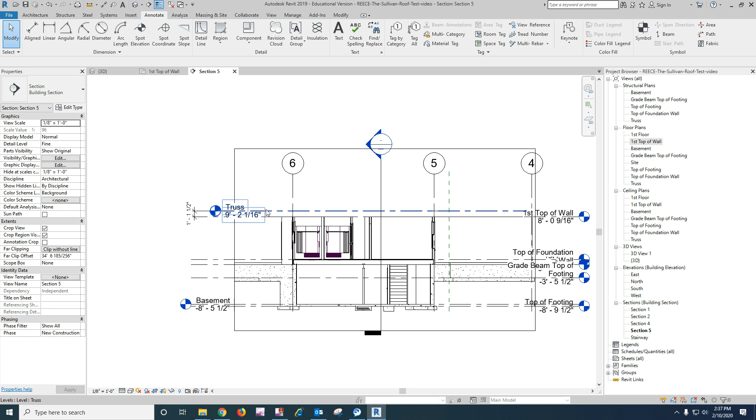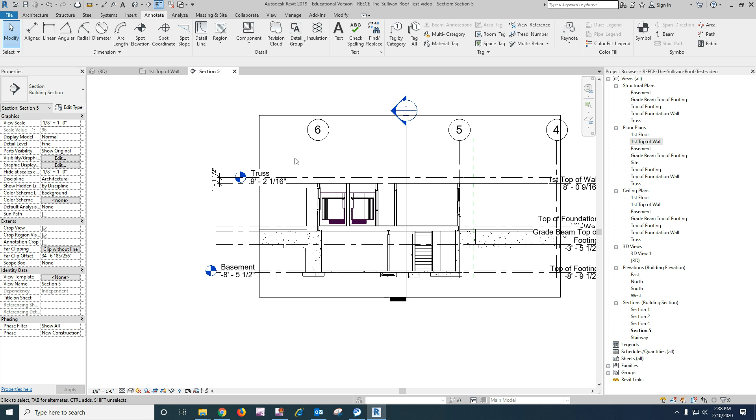I added another level, and I called it just truss, and I brought it in here, and I dimensioned it at 1 foot 1.5 inches up from my top of wall level, and I put that in, and then I locked it. Okay, that's where the top of my truss should line up over the face of the stud once I get it in. It kind of cuts down on having to draw those dimension lines, and I can see it in every view. Okay, so let's go back to here, and let's start with the roof.

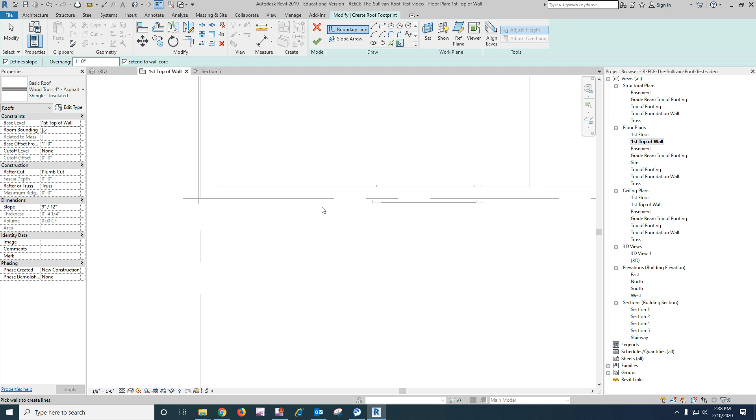Okay, top of wall. And I'm going to start with a base offset of 1 foot. I don't know what it's going to be. I know it's going to be something like that. And I get my thing there. I go extend the core, define slope, 1 foot, and I'm going to choose this wall. And then because I made this wall a stack wall, my face of core is not popping up correctly. So I've got to adjust that. Okay. And I'll show you.

So here I'll go to dimension, and I'm going to dimension off of my grid line to there, and that needs to be 1 foot. Okay, now if you did not do a stack wall across this front, yours may work out just fine. Okay, so now let's go back to pick wall, extend the core, a 6-inch offset, no slope, and I'm going to pick this wall and this wall. All right, and now let's trim our corners together. Okay, that looks like everything. Oh, slope should be 6/12.

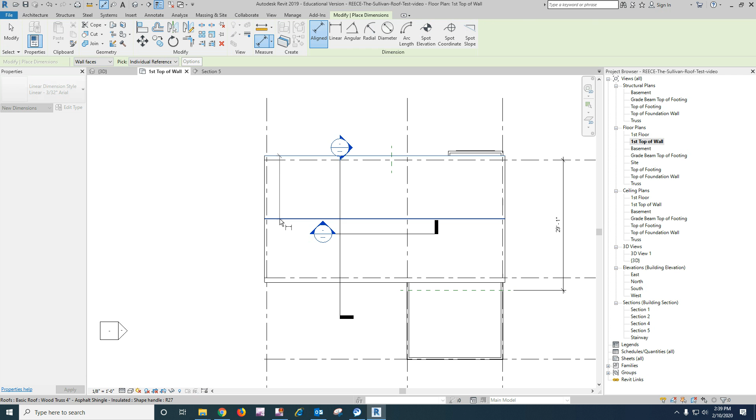Okay, now first thing, check your dimension across the roof there. They should be equal, but they are not. All right, now we know we're going to have to fix that. So let's get our height set on our roof first. So let's go back to our section view. And I come in here and I can measure that up to the top of the actual truss. That shows me it's 2 and 53/128 inch.

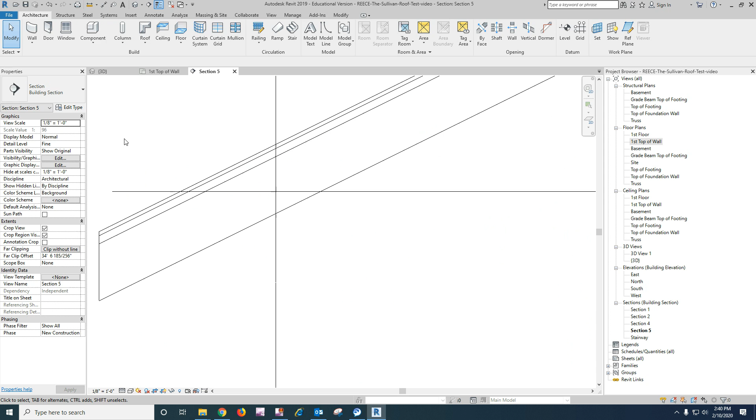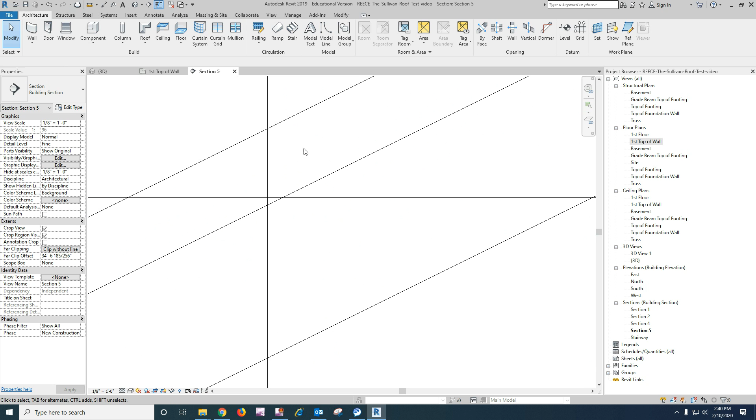Okay, so let's change our base offset. I'm going to pull it down to 9 inches. And then I'll measure again, top of truss to level is 9 75/128. So let's go back to our roof and make that 9 75/128. And the reason we're having to deal with a weird measurement is because we're going to the top of the truss itself, okay? Because that's where it crosses the wall.

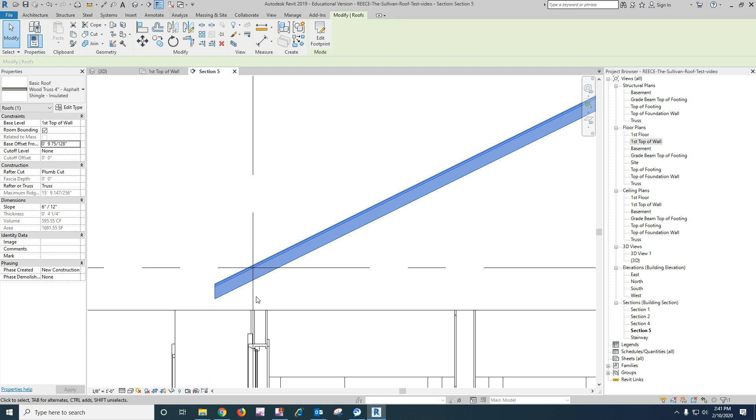All right, so that gets it lined up in the correct place over this rear wall. Let's check our overhang just to make sure. 1 foot. Okay, so we're good. So this rear wall of the roof is correct. The front wall is not. And I'll show you how to fix that.

What we do is here's an option that we have not used in this class before. And when you end up with roofs that are not lining up correctly, height-wise and ridge and stuff, you come over here to Align Eaves. And this shows me the height of the eave based off of the level. We have two options. We can adjust the overhang or we can adjust the height. In this case, we want to adjust the height.

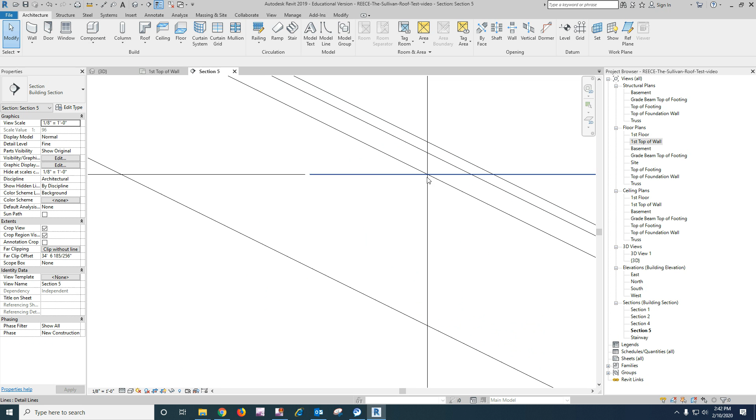So I click on the rear one because that's correct. That's what I want. And if you read your command line down here, it tells you what you're doing. And so now I'll click this one, and it made them equal. I finish out my roof, and we're at 14.2. Okay, so I can come back here to check. I can zoom in right here. Okay, so you can see there it's, oh, dummy me. I did the same mistake I did before. I'm working off of the grid line when I should be off of face of stud.

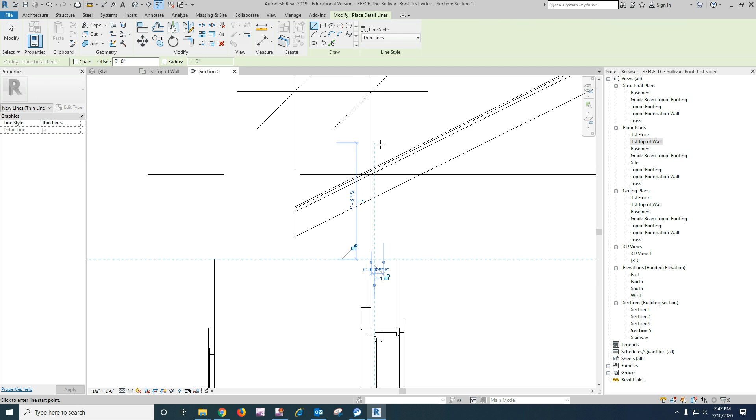Dummy. Okay, so I got to draw a line there anyway. All right, so we know it's got to come down. Measure. Got to come down 1/4 of an inch. Ooh. Can I? Let me see. I won't do it. I tried. Okay. Ooh.

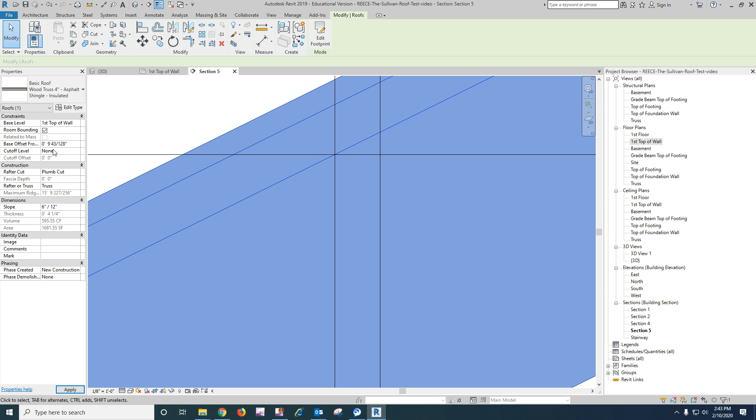Okay, so it'd be 75 minus 32. Syntax error. All right, 43. That's as close as I can get it. I remember from doing that before. If I change that to 44/128, that's 11/32. It jumps it way up there.

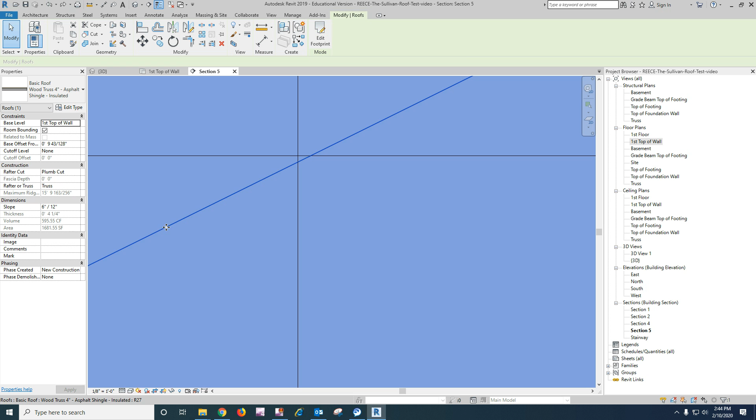Let's see if I go to 256, that makes it 86, 87. Let's try that. Yeah, too much. Okay, so 9 and 43/128 is as close as we're going to get on our roof offset there.

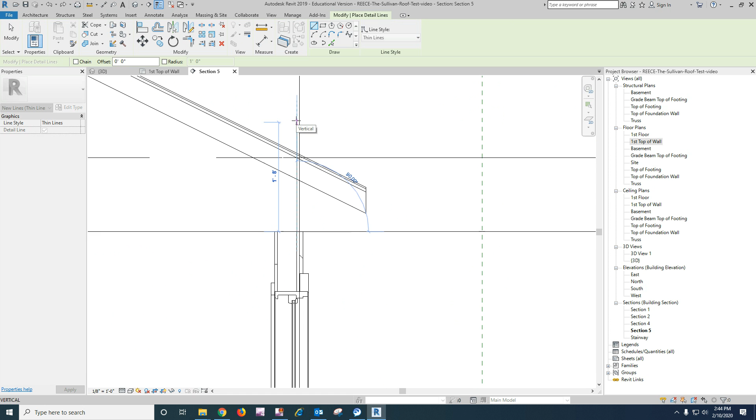And if I come over here, let's draw a line face of stud. And there it's crossing really, really, really close. Okay, so that's as close as we're going to get it. Okay, so this part of our roof is good. All right, now we have to work on this part up here.

Now this reference plane is where the truss hits a girder truss. But you remember here at the porch, we've got a typical roof overhang, so we're going to build our roof based on that. And if we look at our floor plan, we can see we're 3 feet from the wall to the outside edge of the porch. And then we add a 12-inch overhang, so we're adding another 4 feet out this way.

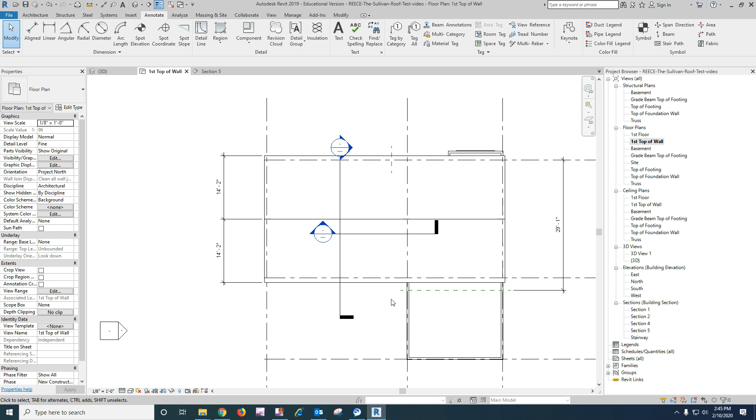So here's what we're going to do, is we're going to come in here and we want to edit our footprint. Okay. And let's do a split segment. I'm just going to put it right there for the time being. And I'm going to pick wall. No overhang. Extend the core. And I'm going to pick that wall. Don't want core. Let me think. 3.5. No, I do not want core.

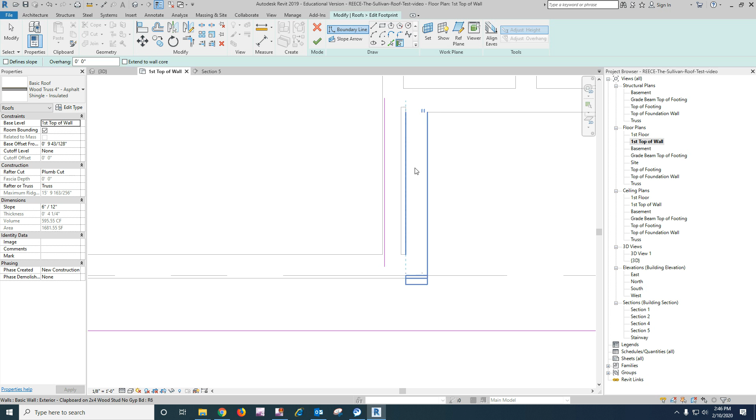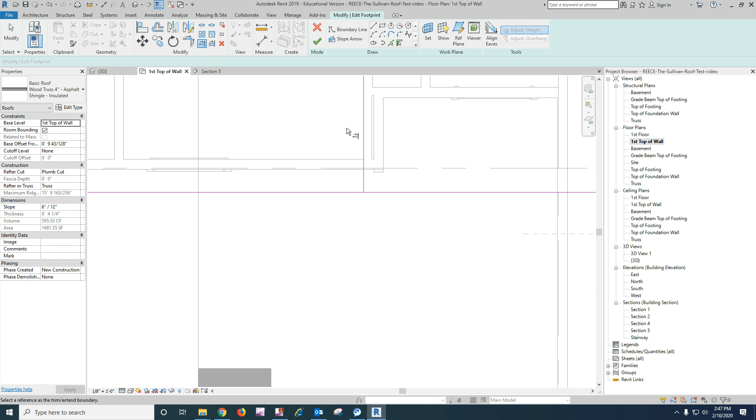So let me back out of that. I'm going to go pick line because I want it to be on the face of the sheetrock, and I'm going to lock that. And now I want to extend that out to here. And in this one, unjoin elements, okay? Now then this one, I'll dimension it from the grid line to there. And make it 4 feet. Okay.

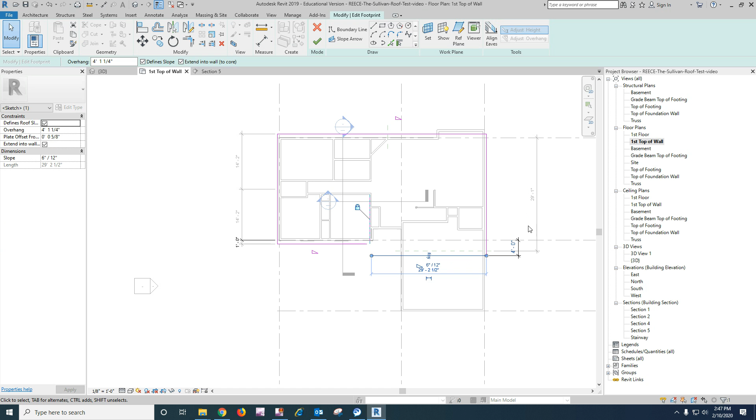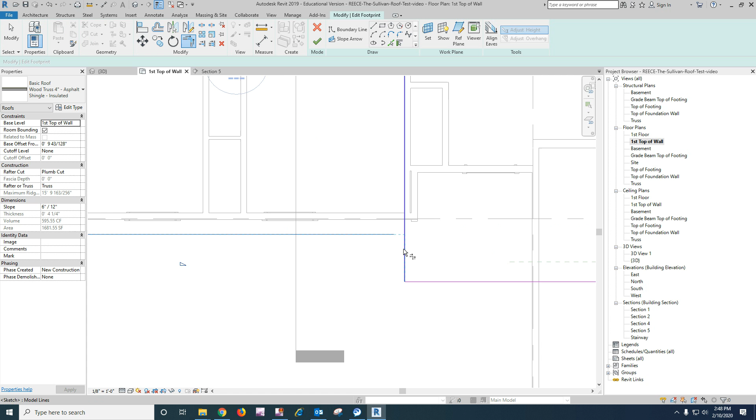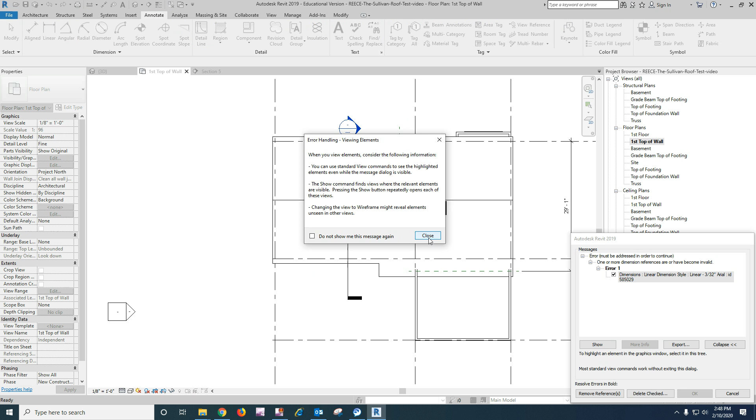And then, no, I didn't want to join those. Sorry. I want to join that and then that. Okay. And we've got 6-inch slope here, slope there, and slope on the back. And then no definition on that. So let's finish our roof. Become invalid. Which ones? Oh, that was in my section view here. Yeah, because that dimension I had there. Okay, not a problem.

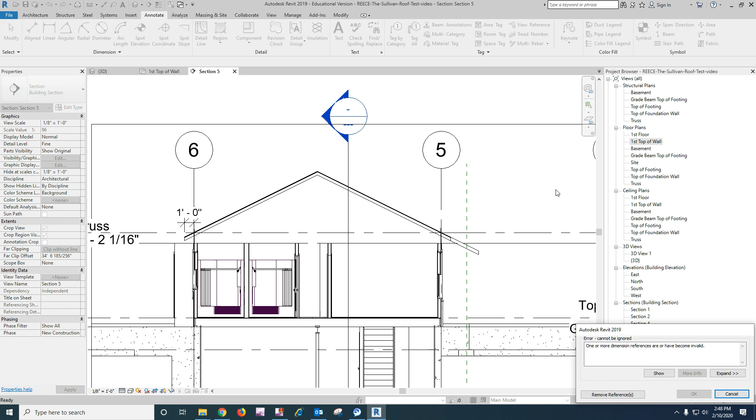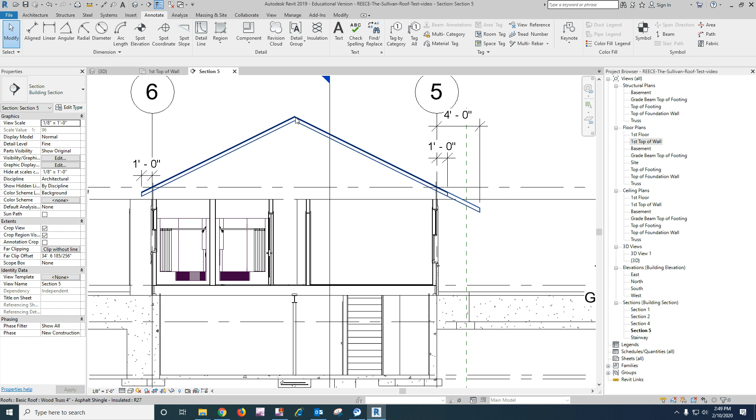So I'm going to remove the reference. Okay. Still 1 foot. All right. Let's check that one. Still 4 feet. Okay. But you can see our overhang is really lower than what it needs to be because it's still using the same peak here. So let's go back to here, edit roof, edit footprint, align eaves, adjust height. Okay, and now you can see it added that pitch in. So let's check our overhang, our ridge distance, 15.8, 15.8. That's good.

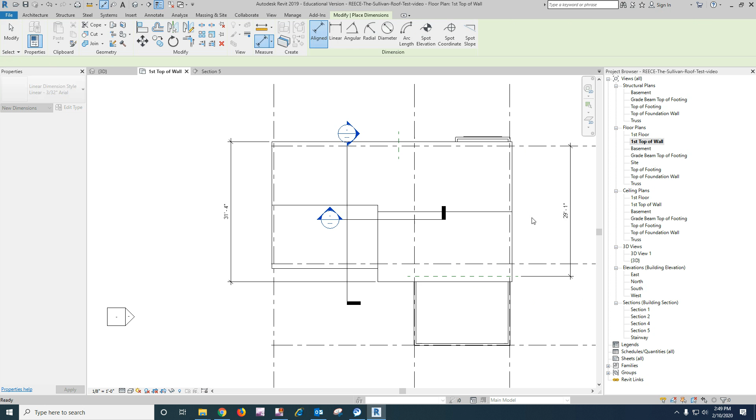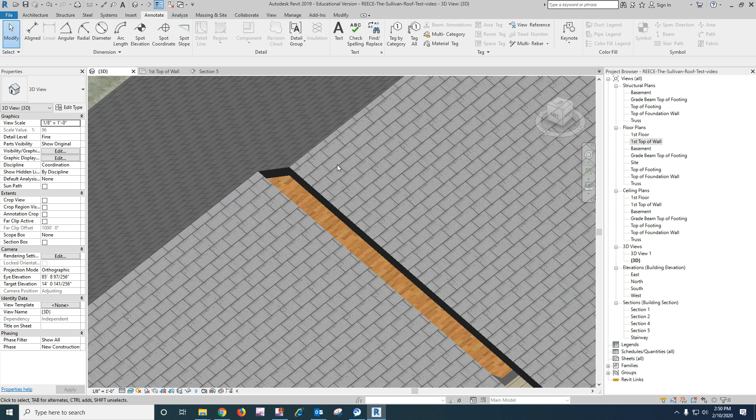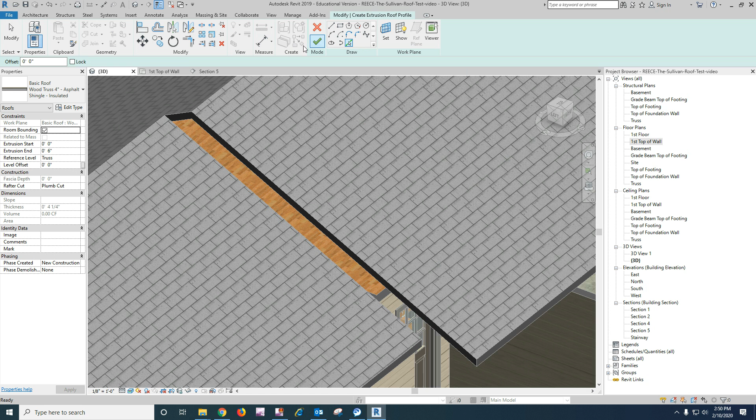Let me go to my 3D view. Okay, and so there, ta-da, that got the main part of the roof fixed, and it's all one piece. Now the solution that Mr. Park came up with is to do a roof by extrusion from here. So we can go roof, extrusion, pick a plane, and I'm gonna pick the edge of that roof there. Okay. And we're gonna pick lines, and I'm gonna pick the top 2 edges of the roof there.

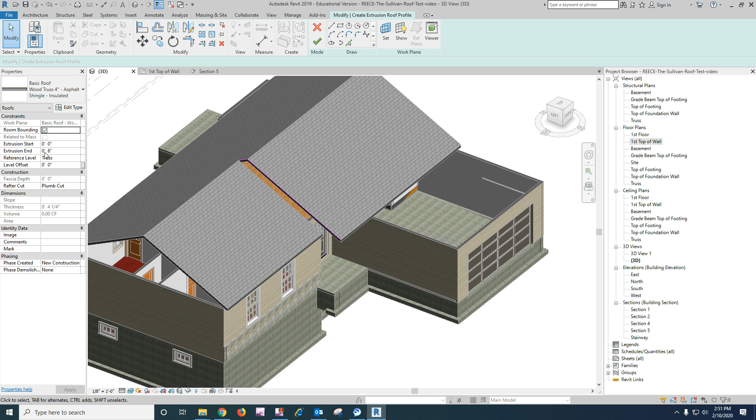Now this one, we'll have to bring it up till it joins there. Okay, and that had a 6-inch overhang, so we're going to leave that and that and that and that. And so we'll go, okay. All right, and so that got the roof made, but here's the issue: the graphics don't match up. I've tried several different things, joining and all kinds of stuff.